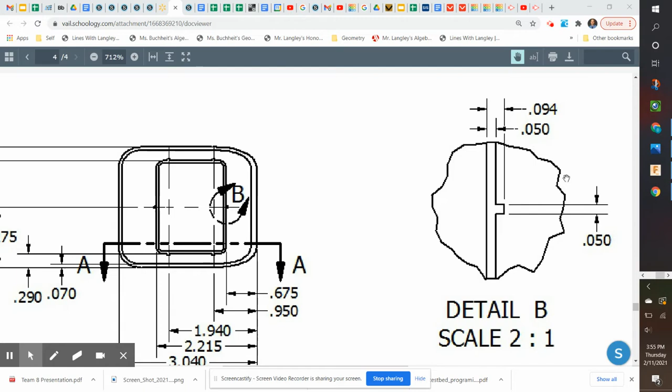Let's pick up where we left off. This distance from the right side edge is 0.95, which you can get from the dimension drawing. We're going to move downward and escape out of the dimension, then draw another rectangle down here that is 0.05 by 0.044, coming away from the offset 0.044 inches, just like the other one up above.

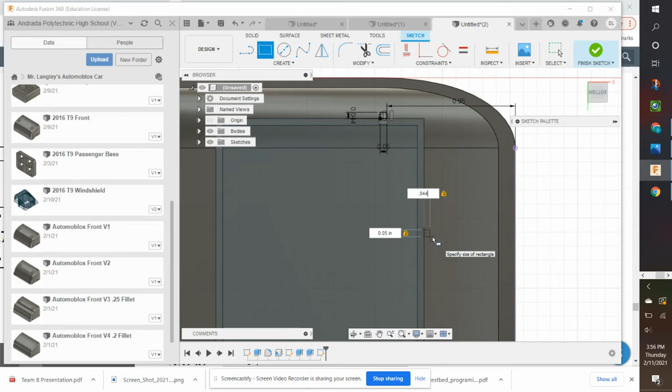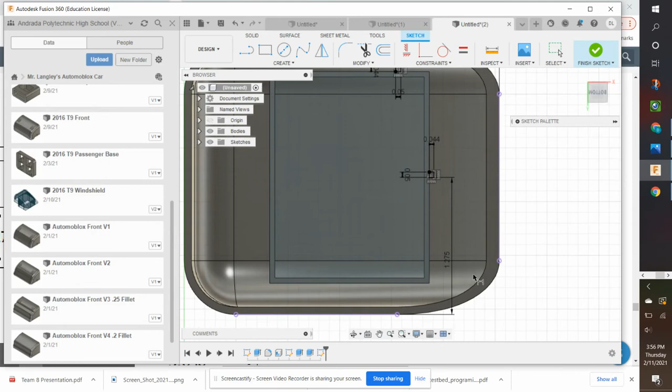Then we're going to dimension that from the very bottom edge, the complete bottom edge. I'll hit the D key and dimension this from down here, and we want that dimension to be 1.275. There we go, and that should be correct now. I don't know if it's perfectly symmetrical with the distance from the bottom as it is to the top, but it looks close enough.

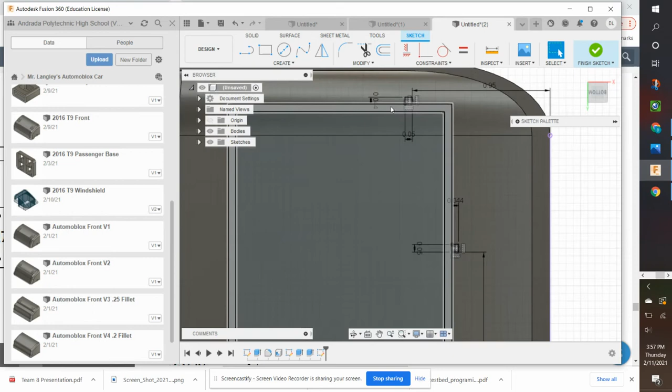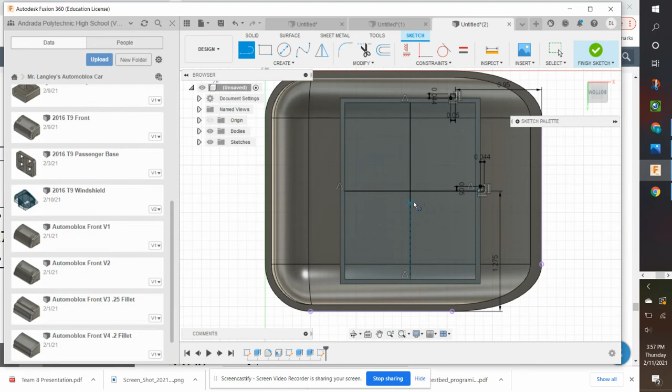Now for the quicker way of doing this - oops, I forgot to draw my mirror lines. Let's draw those real fast. This should snap to the midpoint, and it should snap to the midpoint down below. We're going to do another one where you find the midpoint. Yep, there it is, so it's snapping to the midpoint so we can mirror this.

Now we can mirror it successfully because we have our mirror lines. So we're going to select that rectangle and mirror it across this line. Whoops - need to select the mirror line on the browser window, and there we go, that is mirrored.

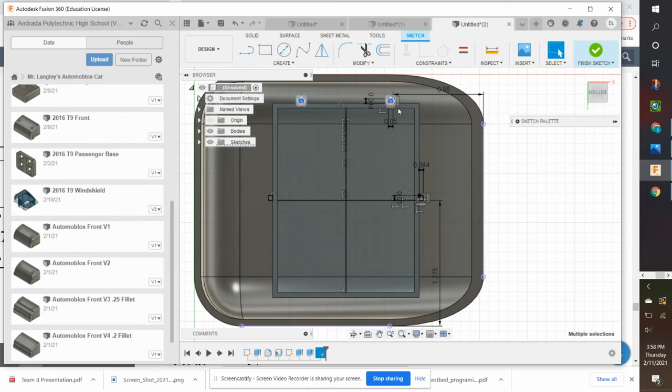We're going to mirror this one, doing the same mirror function. We select the mirror line, and that should show up on the other side. Now let's do our last mirror - we can select both of those rectangles at the top, do the mirror function, and mirror that across. Whoops, I did that again - you don't want to select the mirror line right away, you want to make sure you have it selected in the browser window first. There we go, now we have our mirrors.

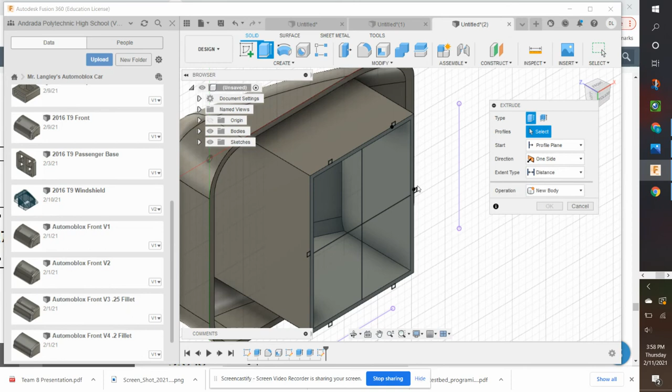Now I should be able to finish the sketch. I'm going to angle this so you can see better, and I have my 6 rectangles. I should be able to extrude those. I'm just going to do this one at a time because it worked better when I did. I might have to orbit it, and we're going to go to profile and select the profile each time.

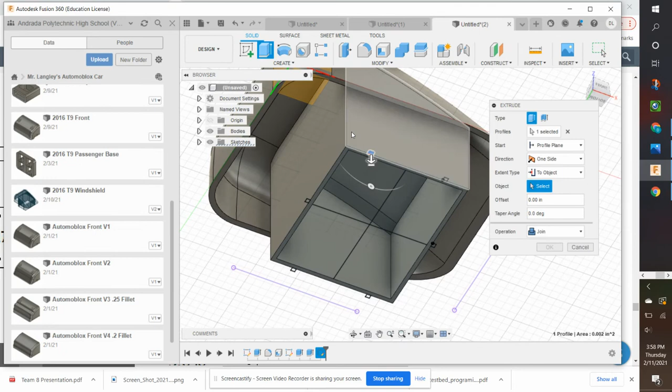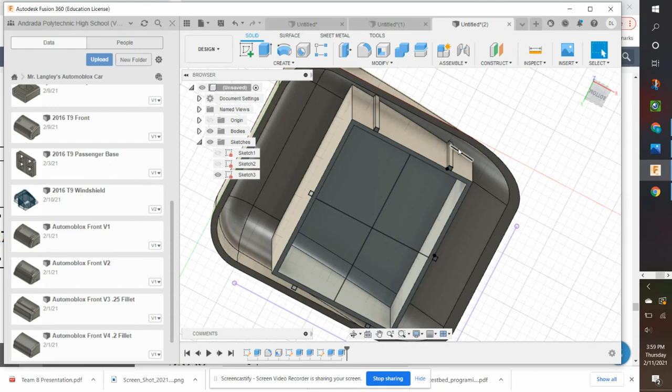There we go, now I should be able to see that object and extrude to it. Now it's going upward to that. I'm going to turn that sketch on so we can see it. Each time we're going to extrude each of those upward to the object. There we go, only have 4 more. Extrude - let's extrude this one to object, to that object, and they should all be working correctly.

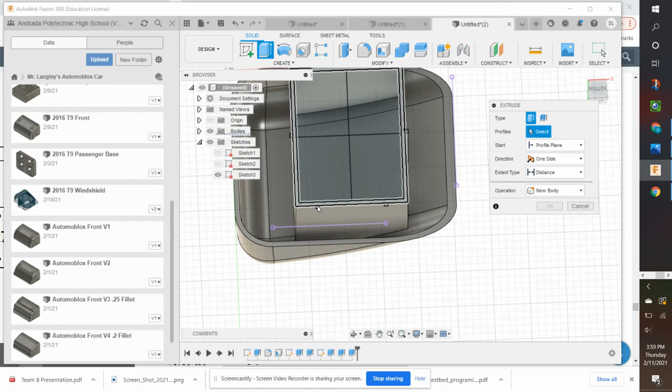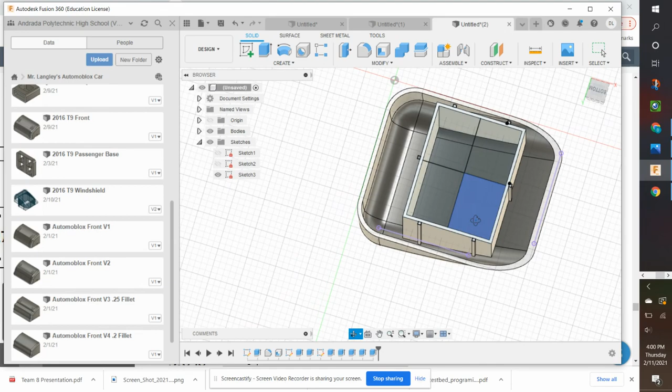We're going to extrude those 2 to object. There we go, should work. Yep, extrude this one to object, and that one. Last but not least, let's extrude this one to object. And there we go - now we have a finished windshield.